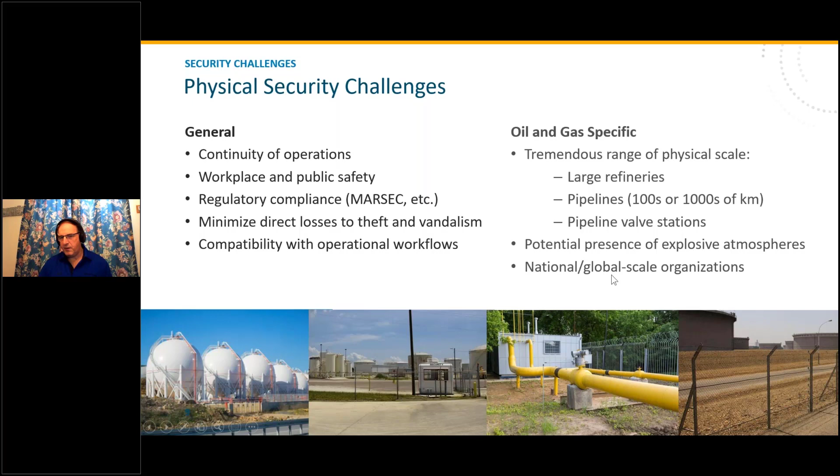The technical aspect of oil and gas is that in some cases you have the presence of explosive atmospheres, so intrinsically safe solutions are of value in that case. And also, again, the scale - you're often a national or global scale organization. You want a company that you can deal with at that same scale.

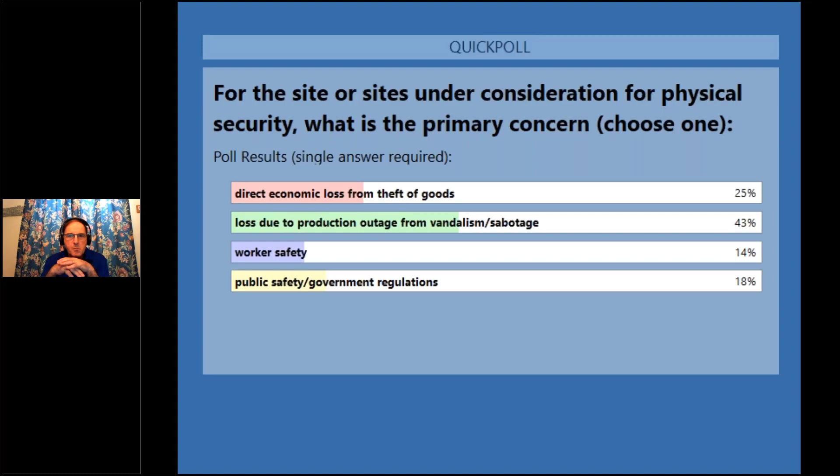Okay, good. So now we're moving into specific applications, scenarios that arise, and solutions that Senstar can put forward for those scenarios. Classically, oil and gas infrastructure is divided into the so-called streams: upstream, midstream, downstream. And here we're looking at the kinds of things you find in the upstream environment, the exploration and drilling environment.

Clearly in those environments, you have production well pads, whether oil or gas. There's a network of gathering pipelines of some sort. There's typically some pre-processing done in the field, cleaning the gas, separating out sand, water, etc., or similarly for oil, pre-processing the oil. So there's some facilities associated with that, and then the product is passed on with the feeder pipelines into the midstream infrastructure.

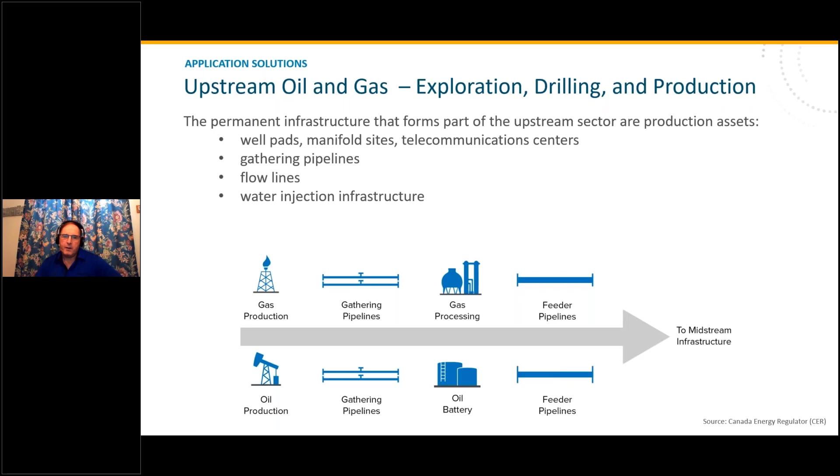So in this upstream scenario, there's lots of things to protect: well pads, manifold sites, telecommunications centers, the lines we just talked about, and - becoming more and more common in recent years - a substantial water injection infrastructure to get water, to process water, to pump it into the ground to enhance the return of the production wells.

So drilling down into that environment, we would have here, say, a classic wellhead scenario. You have your Christmas tree valve, you have some cleaning apparatus, there could be some small control center or telecommunications room for the electronics. This is a small site - we're looking at 100 to 500 meter perimeters. Especially if it's gas, you could have potential hazardous environments. What's the threat? Theft, vandalism, sabotage by actors who want to create chaos.

So what Senstar can put forward as a solution to this environment is a cost-effective fiber optic fence sensor that would be applied to the fence that's there and give you effective perimeter intrusion detection with an intrinsically safe solution, and one that would be compatible with cameras or whatever other facilities would be there.

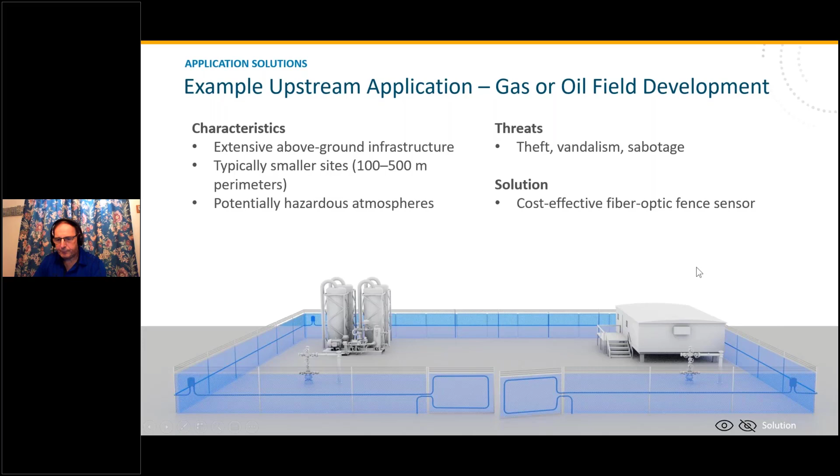Drilling down into a little bit of the product aspects of the particular product in question, which is our FiberPatrol FP400 - here's that same layout now, looking at the product placement aspects. This device can be centrally located in the telecommunications room. We have non-sensing lead-in cable going out to the perimeter, fiber optic cable on the fence acting as the sensor itself. So outside on this perimeter, there's no powered or conductive components whatsoever. It's totally EMI and lightning immune, and intrinsically safe. And this lead-in cable can be up to 20 kilometers long.

So if it made sense to concentrate the actual electronics and processors in one place and feed them out to the different field facilities, you can do that if that works for the application. So what you have, once with the FP400 in place, this is a network-enabled device, so it communicates to the control center through whatever means you have in place to support that IP connection, either dedicated hardwire or satellite connection or what have you. So that's the WellPad Classic solution that we can offer.

The other aspect of the upstream environment is the gathering and feeder pipelines. Because there's lots of wells, there's hundreds of kilometers of this facility. What's the threat? Often it's accidental damage - someone digging unbeknownst to the fact that there's a pipeline in place, or vandalism.

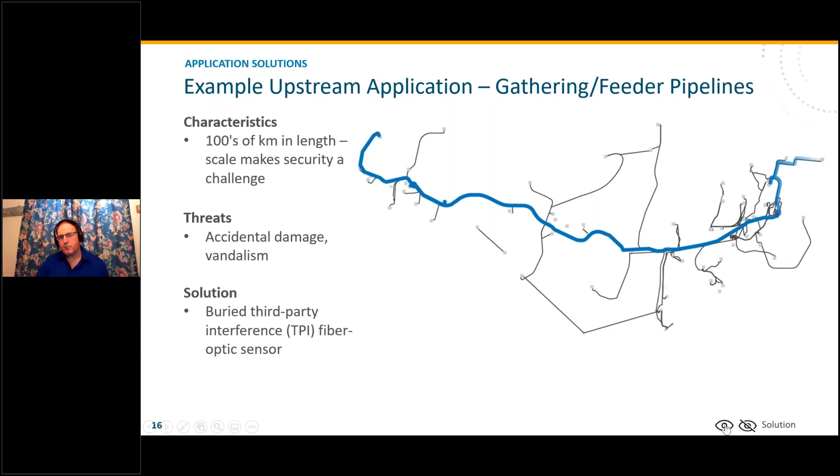Not so much product theft, because it's typically raw product or raw material in those pipelines. So what can Senstar offer to deal with this requirement? We can provide a fiber optic pipeline third-party interference detection system.

Using a fiber buried in conjunction with the pipeline, either a fiber there expressly for providing TPI detection, or a fiber there for telecommunications in the field environment, we can activate that fiber with our system and detect manual digging, machine digging, presence of heavy vehicles, etc.

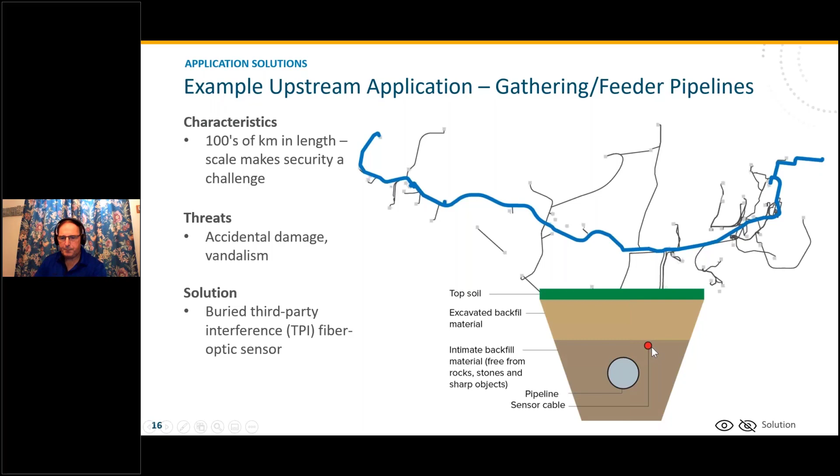A little bit more on that product: it's our FiberPatrol FP1150 for pipeline TPI. With one of these centrally located controllers, we can provide TPI protection on up to 100 kilometers, or 62 miles, of coverage of gathering and feeder pipelines.

When a disturbance or intrusion is detected, the system can report either by zone, which are predefined in software, or the actual down cable distance - how far it is along the fiber optic cable from the system - or if so configured, through GPS.

And as with our other system just discussed, there's nothing conductive in the field. This is fiber optic cable, so it's totally immune to EMI, lightning, and is intrinsically safe.

Now, just to give a flavor of what's happening with this system, I'll run a quick video. We're going to show the system response in the technician's view that you would see as someone does manual digging in the vicinity of the cable.

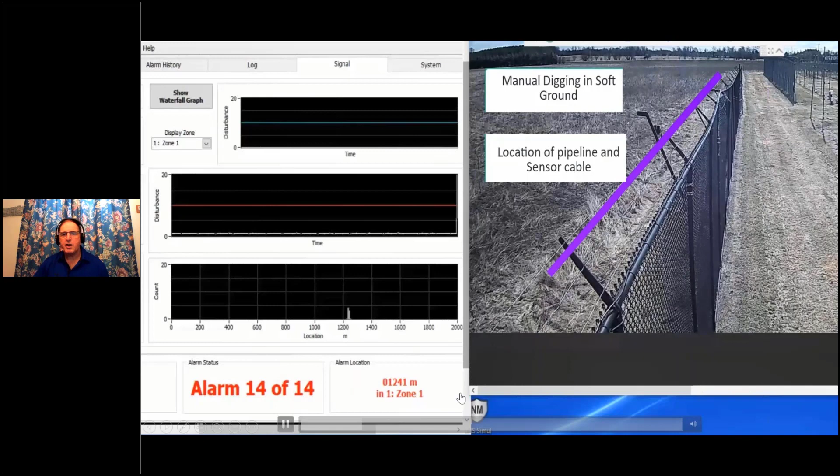I think what's notable is the clear-cut sensitivity of this system to digging. This is soft ground, we're near the cable, and we're getting crystal clear signals of the digging activity. This level of sensitivity extends for many meters outside, from the other side of the cable.

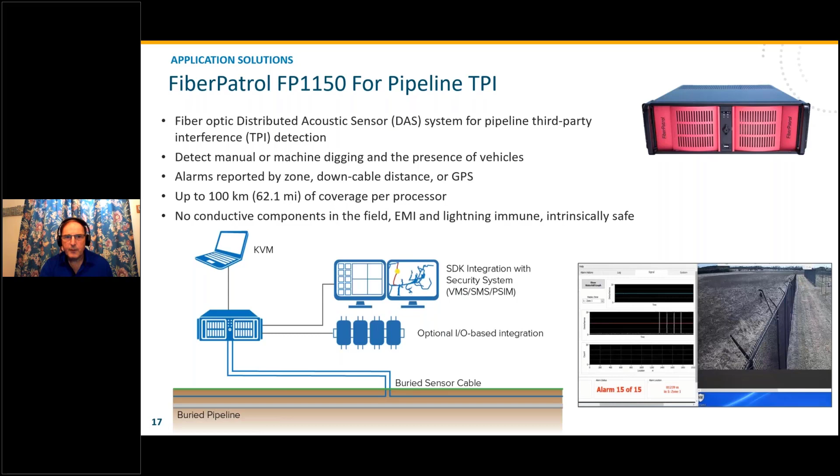So this is our solution for that environment. Moving on, still in the upstream environment, to manage and control all these different facilities in the field, this information needs to go somewhere. Through the benefit of our sensors being network connected, it's easy for us to connect them to a central monitoring location, using either our own software, such as Symphony, or third-party software, to enable someone to monitor the entire field activity.

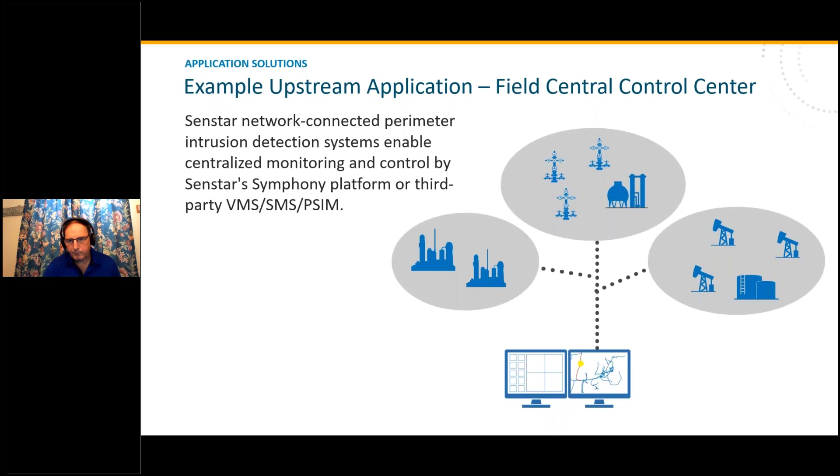This is a snapshot of our Symphony video management system / common operating platform, as we're moving the definition to, as it adds more and more capability over time. So this is Senstar's common platform for video management, security management, and access control.

It has built-in analytics that include license plate recognition, face recognition, and some recently added safe spaces type algorithms to deal with workflow inside work areas, addressing COVID-19 concerns like spacing and face masks, etc.

The system provides redundant server support, so it has that element of reliability, supports edge storage, and has map-based alarm management. We have a little icon of the map here, which can be made as big as you want.

And this alarm display includes tight integration with the sensors. By that, we mean that not only do you get alarm activations, but you get health status on the sensor, so you know it's working. If there's an issue with the sensor, it's reported through this interface.

And you also get detailed alarm location. So with the Symphony system, not only do you get knowledge that something happened in a zone, but you get a specific range dot, as we call it, showing exactly where that intrusion occurred. So that's our monitoring solution for the field environment.

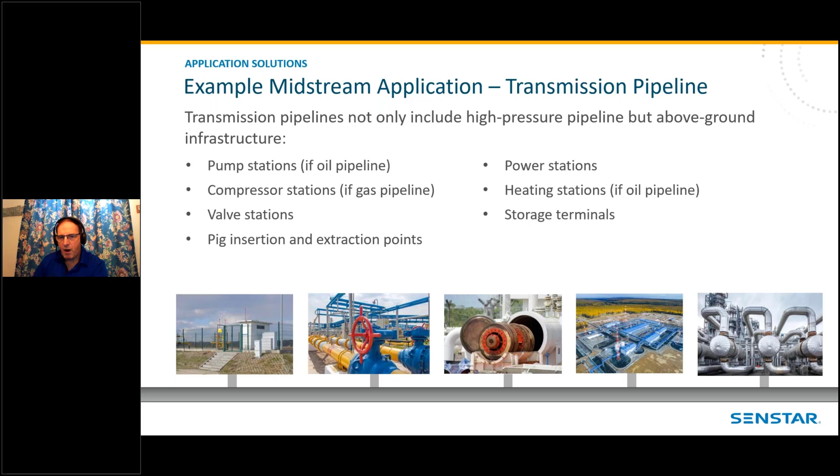So what can we offer to help protect that? We can offer third-party interference detection, as we did before for the feeder gathering pipelines.

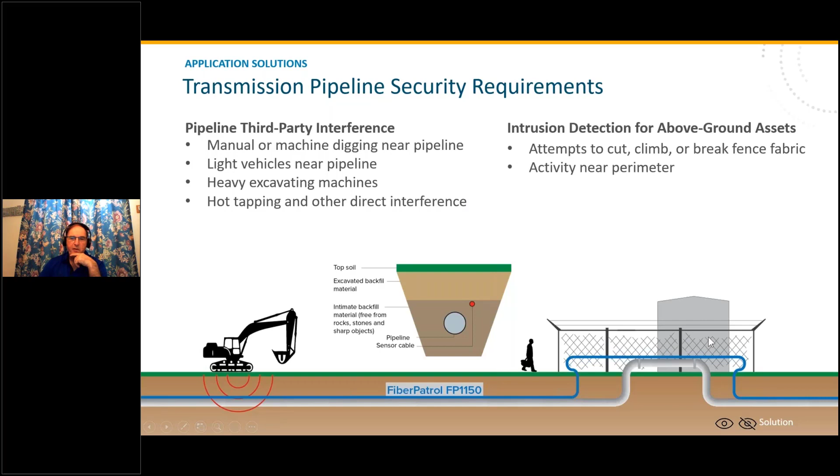We can offer above-ground intrusion detection for the above-ground facilities, as we talked about before. But with this system, the FiberPatrol, we can offer both on one system. So maybe you have lots of above-ground sites. They might be very small, very simple, with mechanically operated valves, and may not have infrastructure there. Wouldn't it be great if the same fiber protecting the pipelines along their route could also provide intrusion detection of the above-ground infrastructure sites? That can be very powerful and save a lot of costs, and that's what we can do with our FiberPatrol FP1150 system.

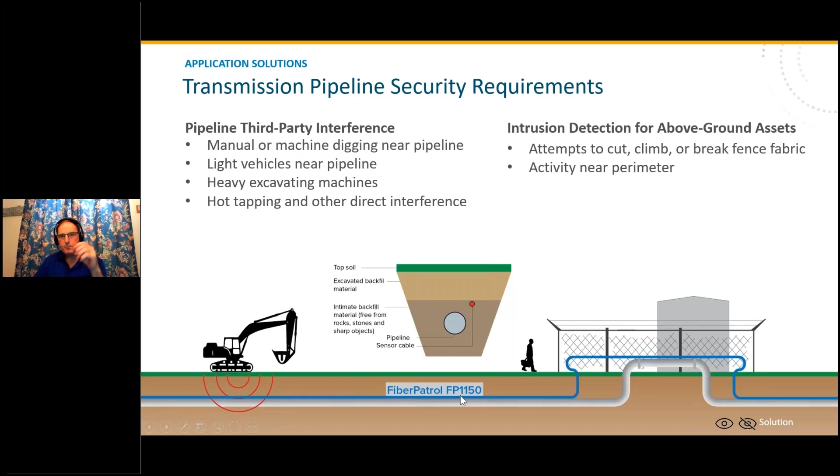Moving on again to downstream, the classic downstream infrastructure is the refinery. Typically huge and large, often built at different times with different concerns, so the perimeter looks different at different parts around it. There are some different requirements potentially, pure intrusion versus intrusion with lighting support. So it's a complex perimeter environment around a very large facility. What can we propose to deal with that?

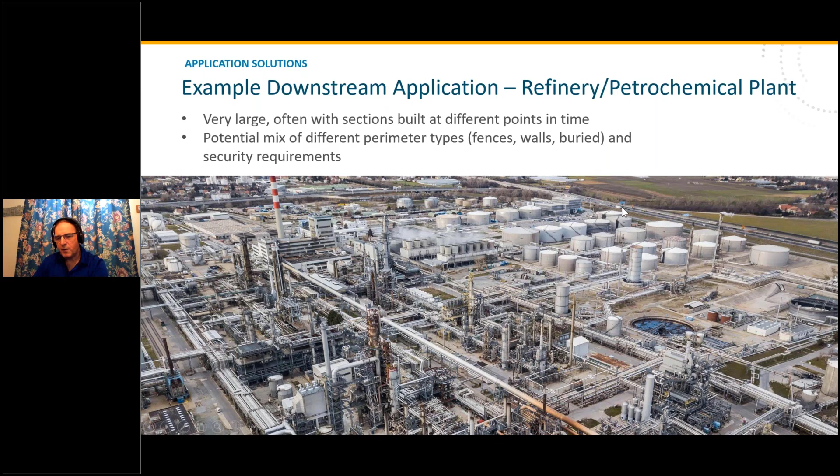Here we could probably mix and match some different products, with the starting point being our fiber product that can be put on the perimeter fence in a standard way, or in a high security anti-climb way. That same fiber can protect swinging gates, and can provide intrusion detection at points of the perimeter where it's advantageous through a buried fiber detection scheme, either because there's no fence, or it's simply desirable to have it buried, or potentially both.

We can do wall top protection, something we see very often in certain parts of the world. Part of the perimeter is a wall, and again we can take that same fiber and apply it to the top corners of the wall. It becomes a contact-sensitive system that will detect any disturbance by the intruder or any climbing aid they may have, such as a rope or grappling hook, that will be detected by the application of the fiber at the top corners of the wall.

We can protect culverts. A large site is going to have drainage, so if there are culverts and grids protecting the culverts, we can protect that also with the fiber.

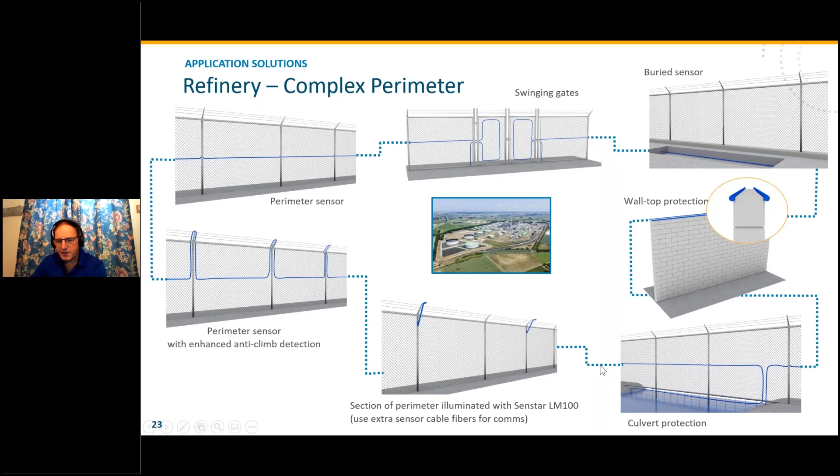The lighting the system provides is programmable. It can be activated on alarms, either from itself or from other systems. It can be controlled through a schedule to go on at certain times, to brighten at certain times. And it's very important to say this is a low voltage solution, 12 to 48 volts DC, which dramatically simplifies the whole installation aspect - there's no AC mains to deal with in installing the LM100 solution.

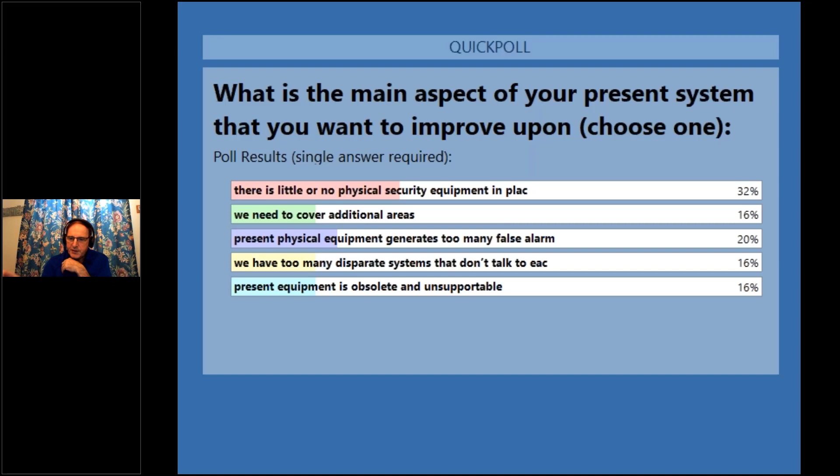So it looks like the major concerns are limited physical security in place and too many false alarms. Well, okay, those are good. That's good feedback, so once again we thank you for that, it helps us learn a little bit as we go through this. Okay, so moving on, thank you for that.

Now we're going to talk a bit about system integration, because it's great to have effective sensors, but that's only part of the package.

So with Senstar, the cornerstone, the centerpiece to the integration story is what we call our Network Manager software. On one side, it deals completely with the communication with the sensors, of which there's different options of how the different sensors can connect.

Ethernet is growing in popularity, obviously very standard, very convenient. We also have long-range fiber, RS422 network options that can be appropriate also.

And our sensors support either point-to-point connections to the control room environment, or daisy chain networks, which enable you to reduce wiring if you have a multitude of sensors around the perimeter. Instead of using point-to-point wiring, the daisy chain is much more effective that way.

So Network Manager collects all the data from the sensors, one way or the other. What is the Network Manager? It's essentially a Windows service that runs on a PC, supports all our sensors.